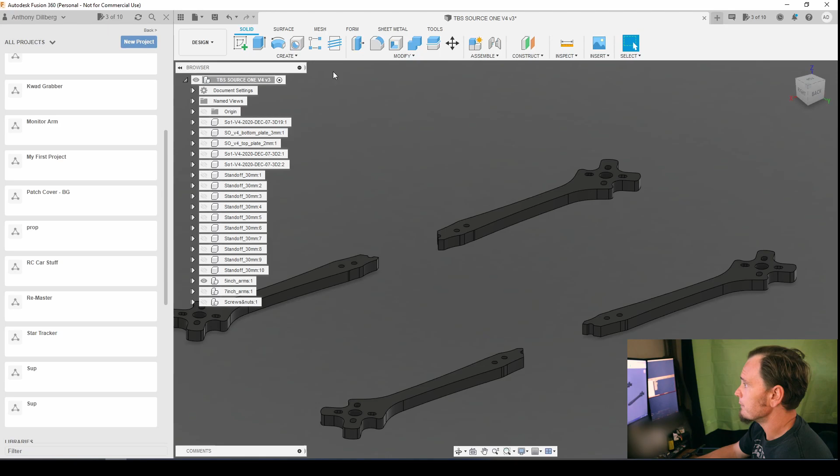So what we're going to want to do up here in the upper left corner, you're going to want to click on where it says design and just go to manufacture, give that a click. That's going to take us to our manufacturer workspace.

So this is where we can do our cam profiles for either a CNC machine. You can also set up profiles for 3D printers, which is pretty interesting. It'll let you do things like simulating the tool path and stuff, so before you take it out to the machine, you can see if it looks good.

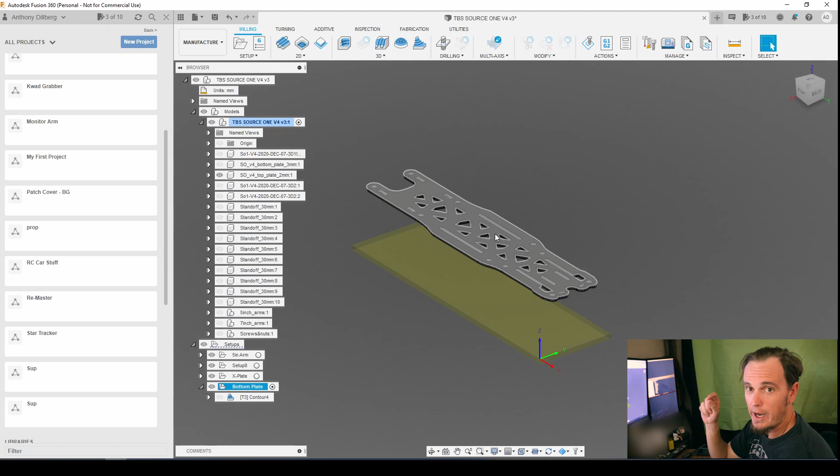If it's doing anything funny that you don't think is going to work out, or you don't want it to, you can simulate that before you actually stick the SD card in the machine and start your cuts or your prints. So once you're in the manufacturing workspace, we're going to want to go up to the upper right hand corner.

You'll see a little icon that looks like some tools. You want to click on that. That's the tool library, and that's going to bring up this screen here.

You can see, since we're working on a project, these are all the tools that I've used so far in this project. Down here are the rest of the tools and stuff that are in the library by default.

This is all of the tools, including yours, that you've added into Fusion, scrolling forever here.

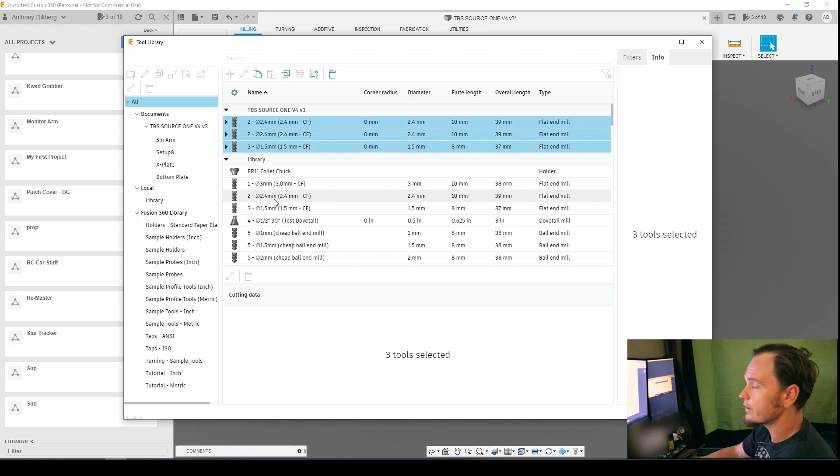So what we're going to want to do actually here, because we don't care about the Fusion library at the moment, we're going to go to library. Now, if you don't have one, it should have the local one, but by default, it'll just be empty.

If you want to add one for a specific project or anything like that, you can just right-click and say New Library and go from there. You can also duplicate the library if you want to use some of those tools.

So what we're going to want to do, once we have library selected here, you can see all of the tools that I have created so far.

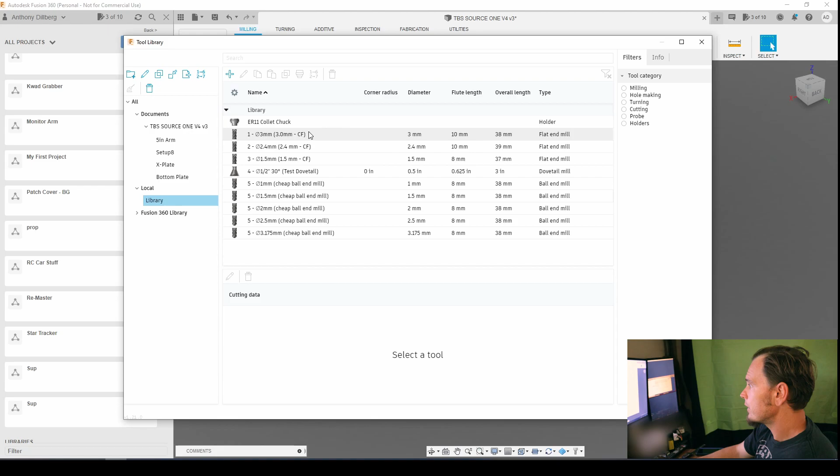We are going to start with this 1/4 inch bit because it's really simple. So you're going to want a measuring device. Calipers are going to be great. If you don't have that, a good metal rule will suffice, but calipers can be pretty handy.

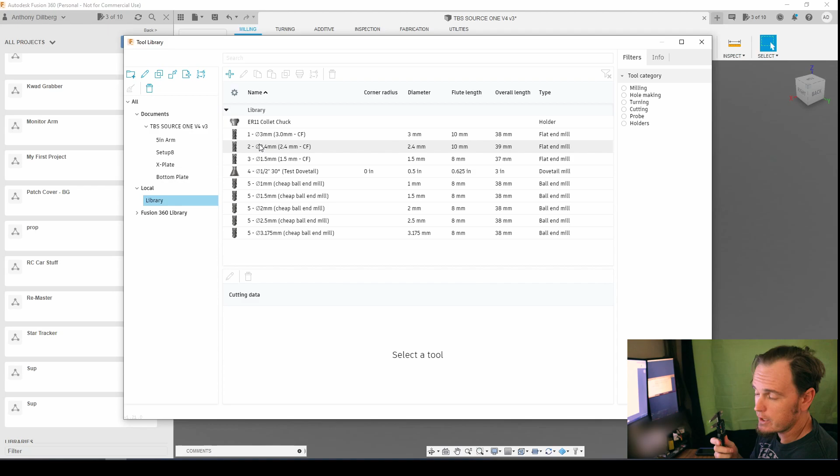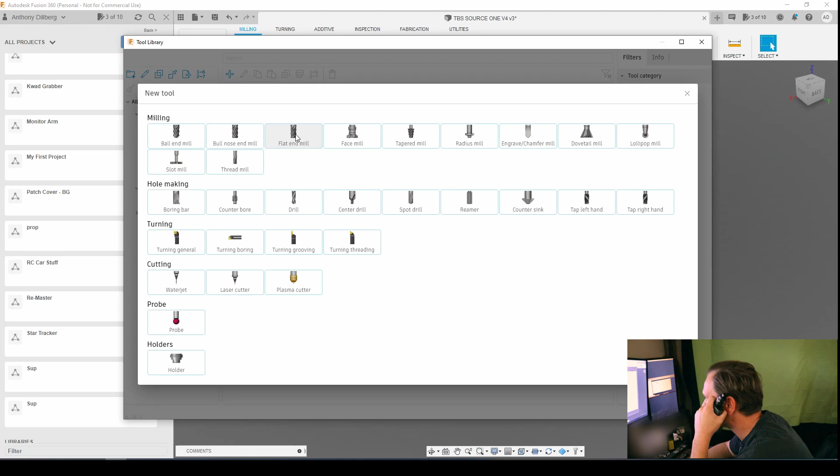So we're going to come up, click New, and we're going to be presented with a bunch of default templates. We're not going to be doing a holder, so you don't have to go down that far. It's not a probe or anything. I guess we're going to go with a flat end mill because that seems to be the closest to what we're doing here.

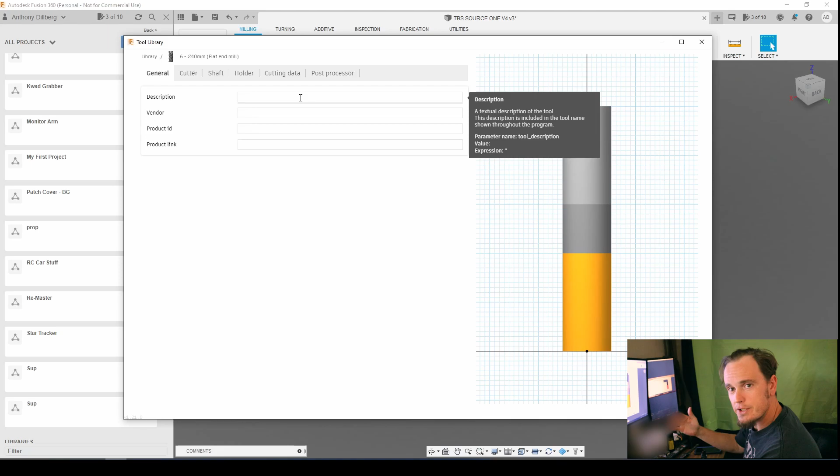Once you click on that, it's going to bring up the window for the actual tool. If you have this actual information, it's a good idea to go ahead and put it in here, just so you know exactly what tool it is, in case you have two similar tools, or you need to get another one and don't remember where you got it.

So you can put in a description. This is a 1/4 inch router bit. I think this is high-speed steel, so we'll say HSS router bit. We don't know the vendor or product or any of that stuff. If you know the product ID, like the part number, it's a good idea to put that in there, because if you have to get a new one, you can just search the part number. If you have a link to where you got it, you can chuck that in there for the same reason.

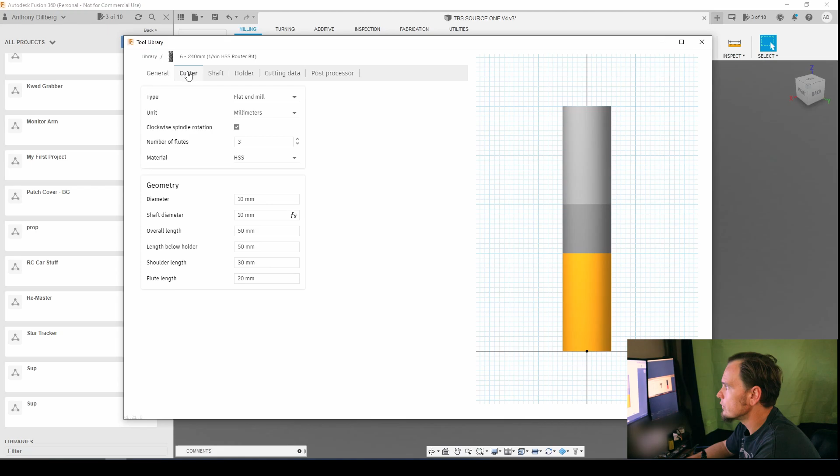Next, we're going to go to the actual cutter itself. If you decide you wanted to change it to a different one of those other options it gave you, you can click the drop down and change it here. We're going to leave that.

So it's a 1/4 inch bit, but we're going to go ahead and leave it in millimeters, because everything else in the project and everything I'm doing is millimeters. Even though I am an American and I love freedom units, millimeters, frankly, are a little bit easier to design with, so that's what we go with.

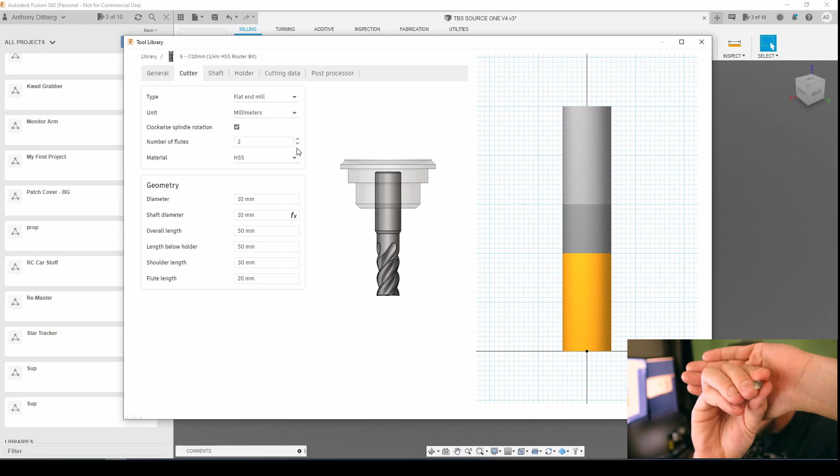Number of flutes - this is the number of slots or grooves, effectively the number of cutting surfaces on your tool. So this one, it's 2. There's 2 cutting surfaces, 2 slots going up there - that's 2 flutes, so we're going to change that to 2. It should be a clockwise rotation. Yep, it's clockwise. That's pretty standard, so we'll leave that checked.

The material is what the tool is actually made of. In this case, I'm pretty positive it's just high-speed steel by the look of it, and it was cheap. It's not coated with anything, it's not carbide, and we're way too broke for ceramic tools. So we're going to leave that at high-speed steel.

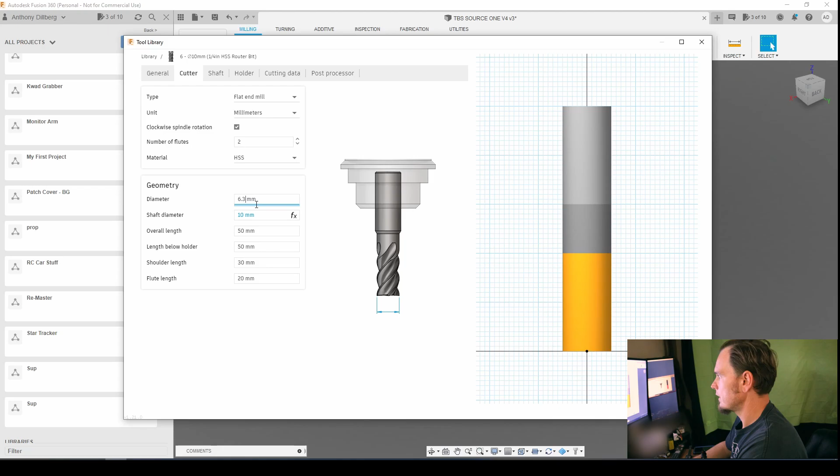The shaft diameter should be the same, but it's good to check. Oops, gotta get on the actual measuring surface. Yep, 6.3.

The overall length is the total length of the tool. That one's a pretty easy one to measure. That is going to be 51.3.

51.3. Length below the holder is the part that is going to actually be sticking out below whatever you're holding it with. In this case, an ER11 collet chuck. This particular bit, I'm going to take it right up to the end of the flutes, basically. So that is going to be, we'll call that 23 and a half.

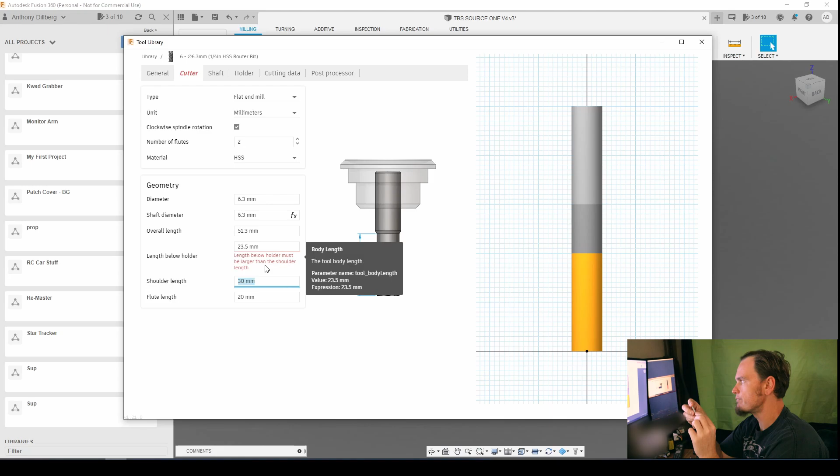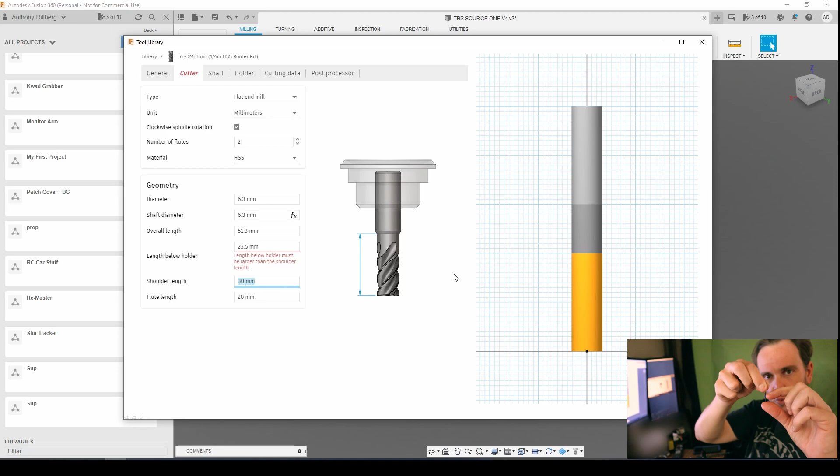23.5. The shoulder length is basically the length up to the end, well, where the shoulder is. Basically, it's kind of the end of the grinding on the tool. In this case, it would be like right before it flares, up to where it flares. So from the flare down, basically all the way to the tip. So from that, the top of that shoulder, all the way down to the tip of the bit.

So we're going to go here, and that's going to be actually just a tiny bit shorter than the end of the flutes on this one. So we're going to go with 20.75.

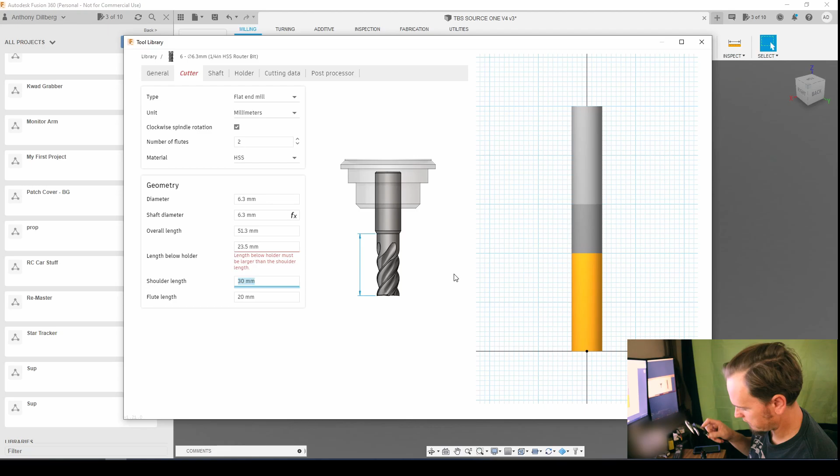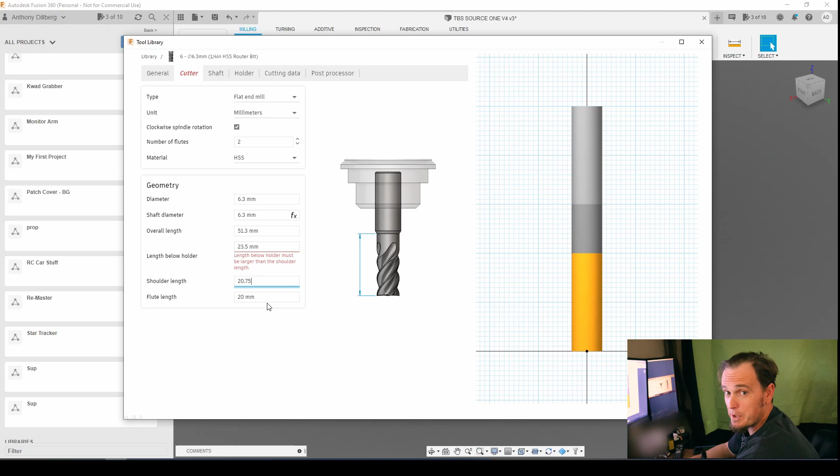And honestly, for most cases, these lengths aren't super critical. If you're using a more advanced machine, it probably is. But again, all of this is going to come in the data sheet with your tool. So if you're using a more advanced machine, you're probably using a better tool than I have here, and it should have a data sheet. So you should be able to look that up and just punch those numbers in here.

So the flute length here is going to be the same in my case as the length below the holder, but it might actually gripe at me here. Yeah, okay, so the shoulder length must be larger than the flute length. So we're going to swap these basically. Yeah, so we're going to make the shoulder length the same as the length below the holder, and it should be fine. Then we'll make the flute length the 20 and 3/4.

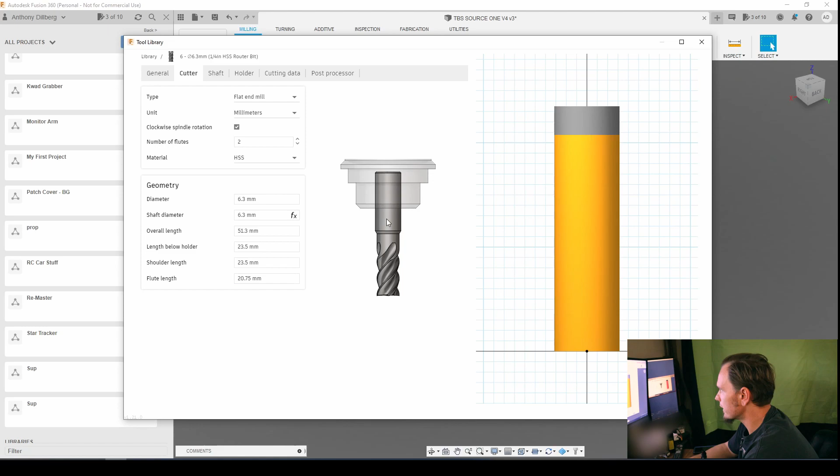20.75. So there's our tool, and you can see on the right-hand side here, it gives us somewhat of a preview. It's kind of a generic thing because it's acting as if it's cutting a cylinder, which sort of is, so you don't have to see all the flutes and so on and so forth.

The next thing is the shaft. I don't really do anything here. I guess it could be that if it's like a brazed on ceramic cutting tool on a high-speed steel shaft or something like that, then I suppose you would need to do that.

The holder, in this case, I have an ER11 collet chuck already designed, so I'm going to select that one. And you can see the preview here is going to change, and it's going to look kind of similar to that guy there.

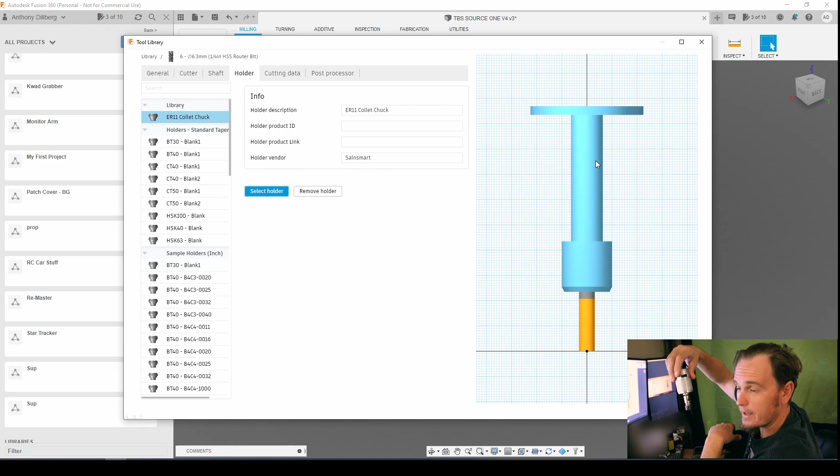The cutting data - this is going to be the speed, like your speeds and feeds and all that stuff for the tool. So in this case, the spindle on my machine is the 20,000 RPM spindle, but because I haven't upgraded to a newer or better power supply, it doesn't quite get it all the way up to 20,000. So we're going to spin this at 14,000 RPM.

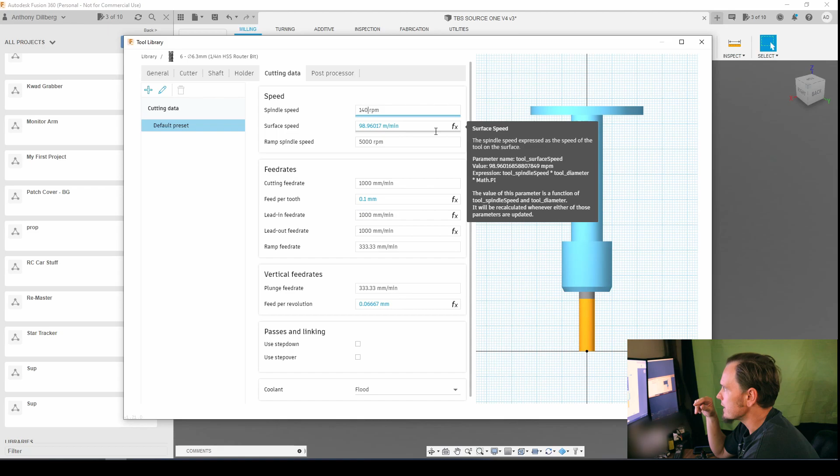And ramping - no, we're going to keep it because we want to keep it at a steady 14,000 RPM. So we're going to keep the ramping speed the same as well.

Cutting feed rate is where we're actually going to want to cut that way down. So we actually want to go to about 120 millimeters a minute. Should be pretty good.

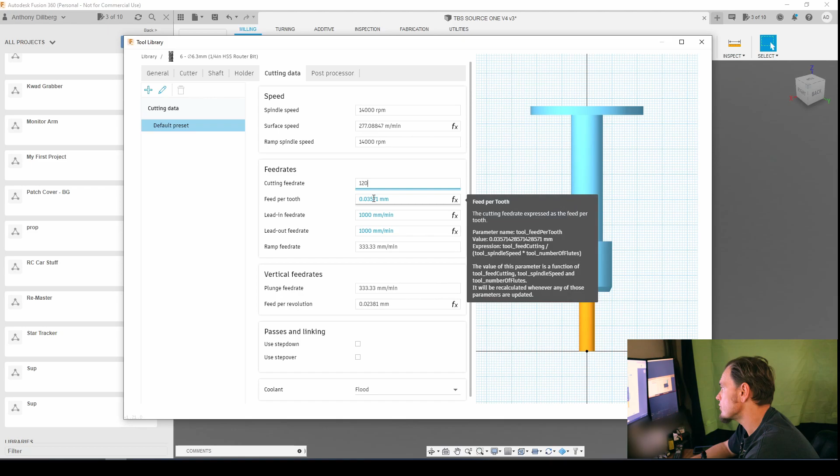And you'll see all the other stuff will kind of update automatically, except for the ramp feed rate. And I usually just keep the ramp feed rate the same. It seems to be okay. If anything, you want it to be a little bit slower, it seems like to me, because it's actually diving as it's moving.

The plunge feed rate, again, if it's going in, for this particular type of bit, we're going to want to keep that really slow. Not quite like 1 millimeter a minute kind of thing, but probably like 10 millimeters a minute. That should be slow enough.

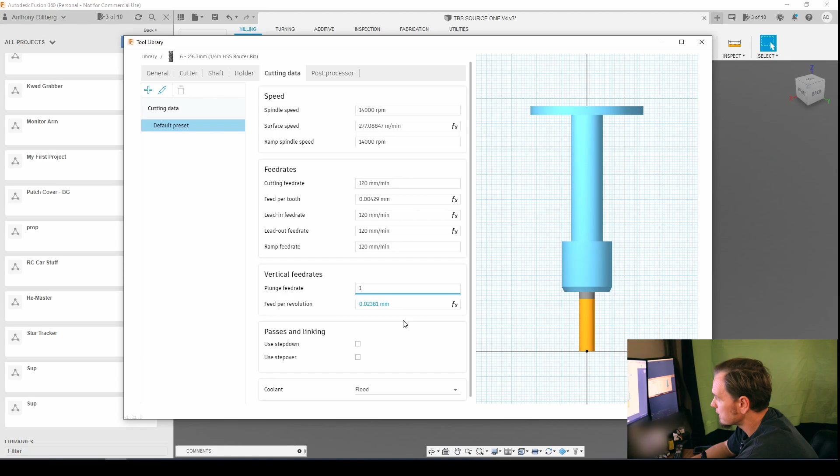We're not going to be using any coolant because this machine doesn't use coolant, so we're going to disable that. And yeah, we shouldn't really have to worry about the step down, step over stuff.

The post processor. Oh, okay, yeah, so this is like if your machine has automatic tool changing and stuff. We don't have to worry about that.

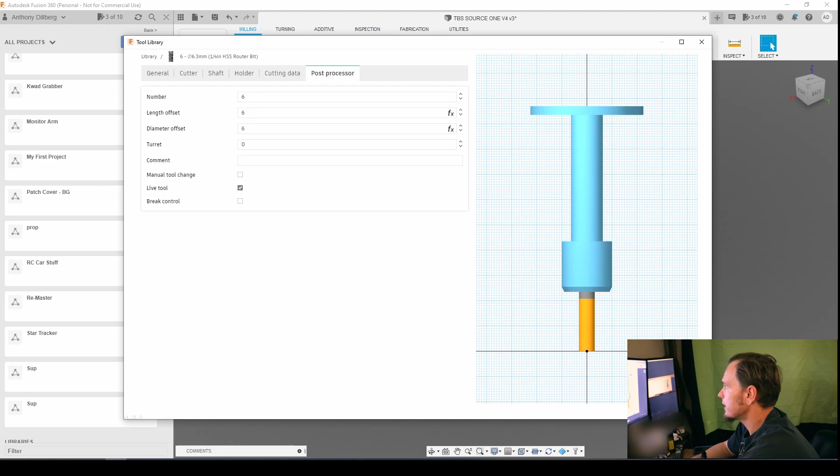So now we just hit accept, and now you can see we have our 1/4 inch high-speed steel router bit. So that is making a tool. I probably made that way longer than is really necessary, and maybe even more vague than it should be. But hopefully it's as simple as it needs to be, and clear enough that you can get your tools in here.

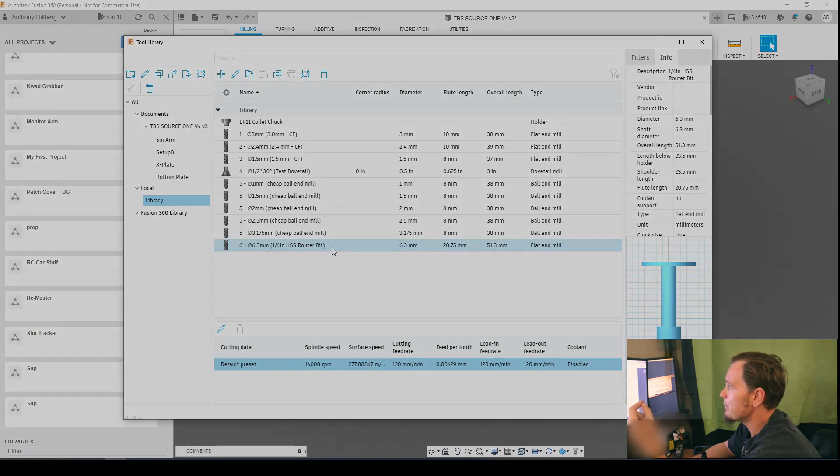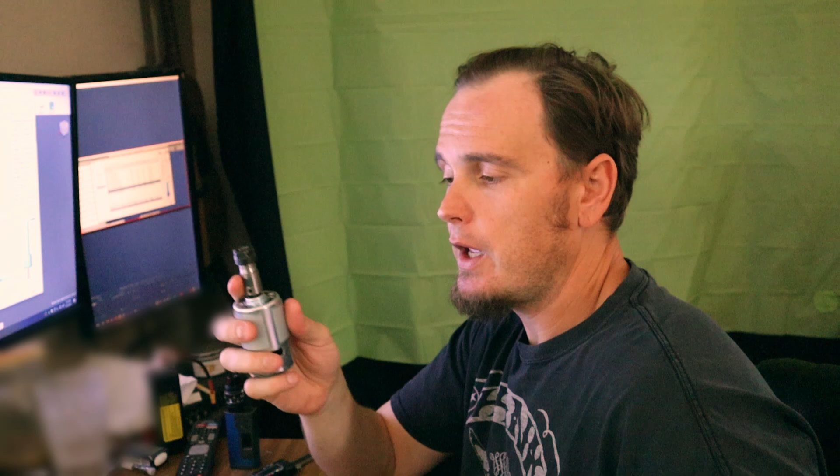And this is not in the Fusion library by default, which is not entirely surprising because it's mostly like a router chuck and small tool thing, and Fusion honestly is geared for bigger operations. You can use the personal license like I am now, because my student license finally expired, which is sad because the student license actually has all the stuff, so all the rapids are gone. That's the biggest thing, so the machining process takes longer. For me anyway, that's the biggest thing. Anyway, so we're going to be making that tool holder.

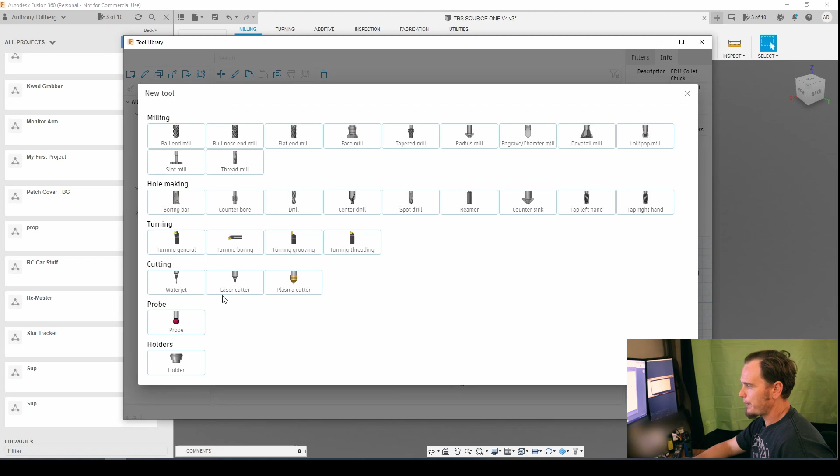As I showed you before, I do have one made already, but I want to make another one just so we can demonstrate. So what we're going to do is go back up here to the tool library, go to the upper left, click the plus symbol for new, and this time we're going to select holder.

This is a little bit of an interesting thing, and it confused me until I finally found a video that sort of explained it decently. I wish I could remember what video it was so I could leave a link in the description. If I can find it, I will.

So anyway, same thing here. When this window comes up, you're going to have description, vendor ID, all that stuff. If you have that available, put it in there. It's good to have.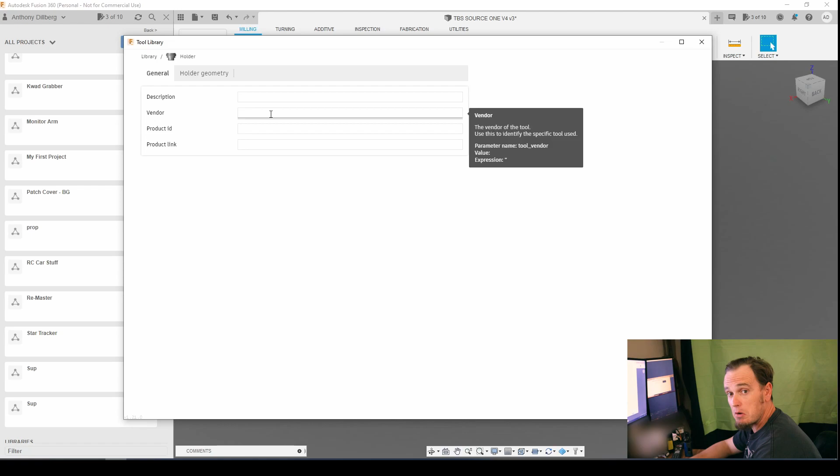Next is going to be the holder geometry, and this part isn't necessarily straightforward if you've never had it explained. Once it's explained, it's like, oh yeah, that makes sense. Basically what you're doing is creating a series of cylinders and cones that are stacked up to create the outline of your tool holder.

So in this case, again, the ER11. What we're going to want to do is break this down into separate measurements in stages. We're going to start from the top of the holder and work down. If we're looking at it this way, it's bottom up, but considering it's normally oriented that way, it'll be top down.

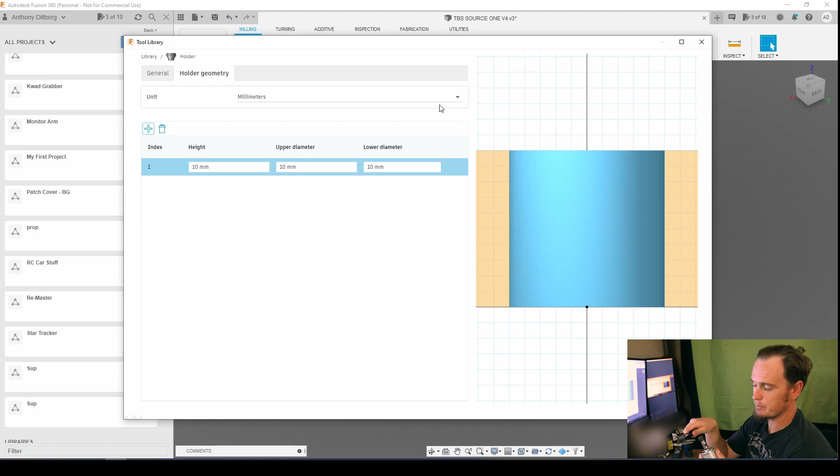So first, we hit the plus. That's going to give us generic 10, 10, 10. We definitely don't want to stay with that, so we're going to take some measurements here. We're going to show the base of the motor itself, because on the machine it does stick out just a tiny bit. Let's start here since we're on the height.

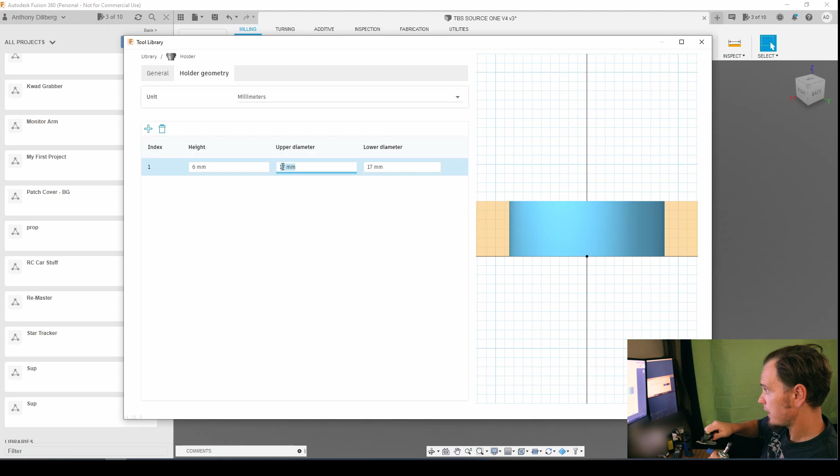Measure that, so we're going to call that 6 millimeters. This will make a little more sense as we go on here. So 6 millimeters high, and the diameter of the motor is 42 millimeters. Because we don't want any taper there, it's going to stay 42. Okay, so now we've got that little base of the motor there.

Okay, so next we're going to show the little nub on the base of the motor there. We're going to hit the plus symbol, and it's going to show us our copy - it's going to copy the previous one, which is fine. We just have to modify it now.

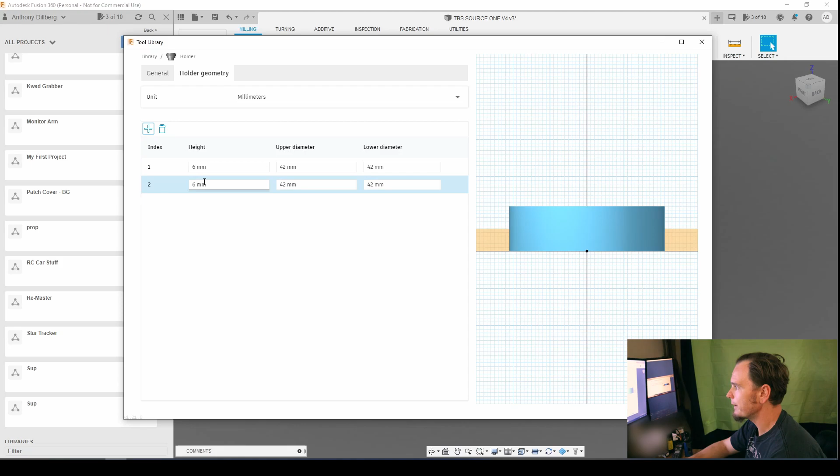So this is going to be 4, 17, and 17 from our previous measurements. Now you can see it's starting to look like a little top or button or something from the side. Okay, so that's the base of the motor to where the shaft of the chuck begins.

So we're going to see if we can get on that shaft, get a measurement there. If not, we'll eyeball it. Looks like it's probably a 6mm shaft. Yeah, 6mm shaft. And then we're going to want the distance in between there and what we'll call the chuck.

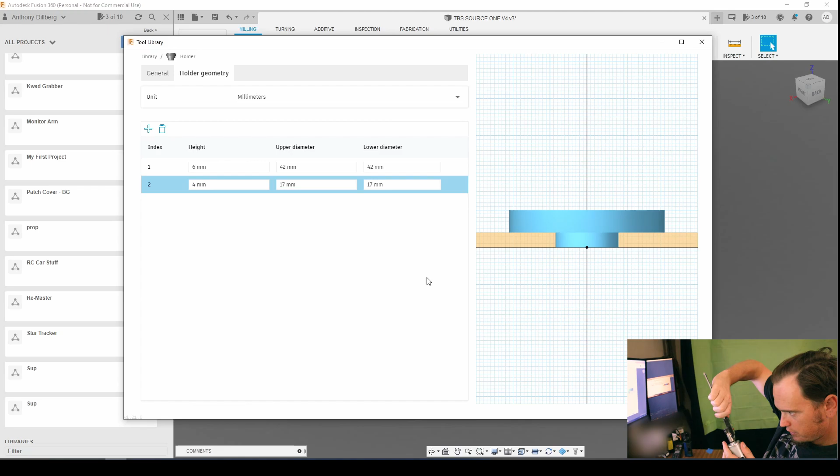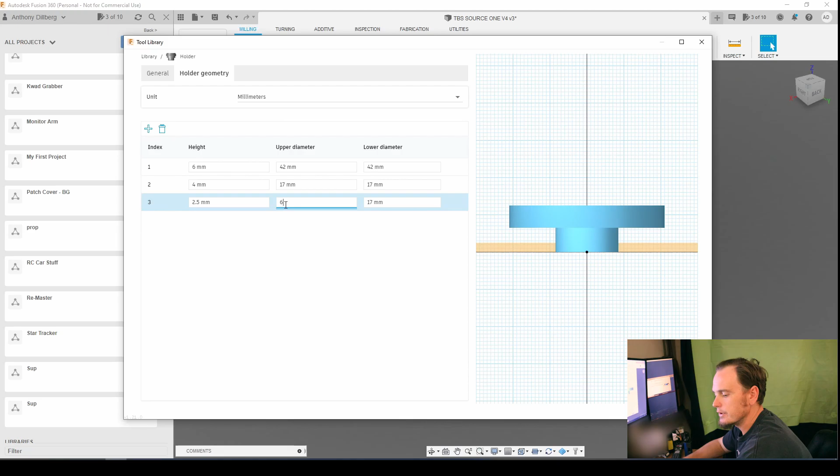2.7, call it 2.5. So we're going to copy that, and it was 2.5 millimeters tall and 6 millimeters in diameter at the top and at the bottom. Starting to come together now. So we've got that little tiny piece of just a shaft, which it would be nice if it wouldn't require a big chunky motor to make this shaft go all the way through, but it's what you get when you're working with a small machine.

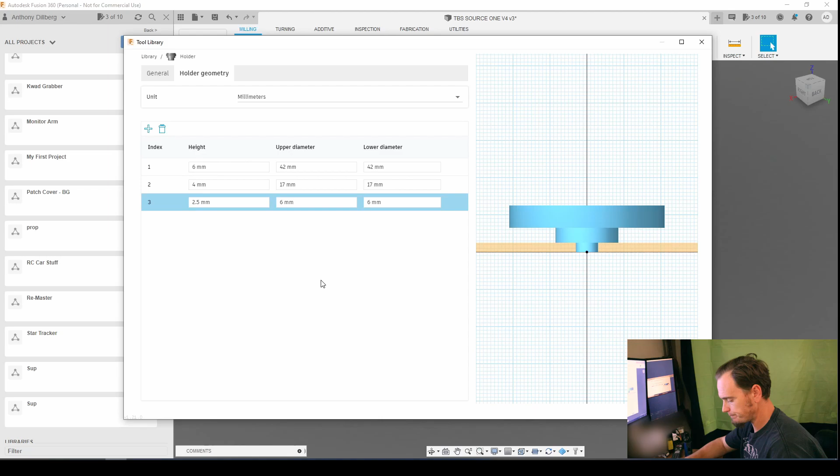Okay, so next we're going to start on the next one here, and we're going to the actual chuck part now. So that is going to be 16 mil. Seems about right, let's see. Yeah, 16 mil diameter. Oh wait, hang on, that starts with height. That's okay, we'll go to 16 mil and 16 mil here, and then we'll go back to the height. Okay, so the height is this way then.

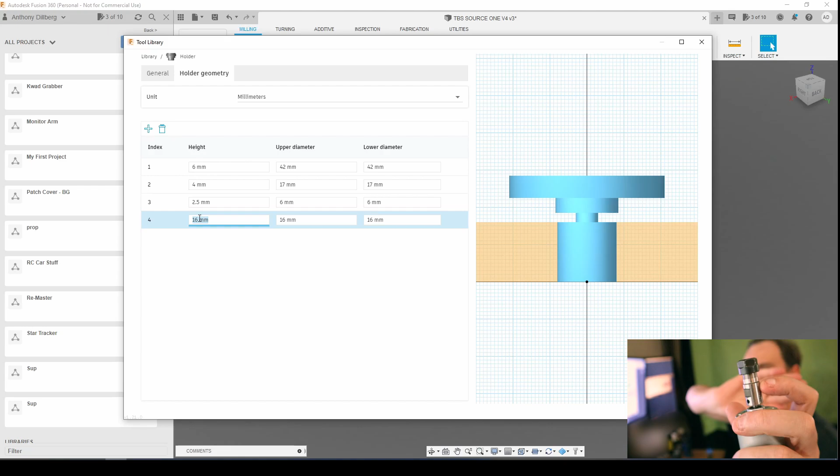20 millimeters. There's a little shoulder there, I don't know if you can see that. That little shoulder is going to be our next cylinder, where that starts. So it's going to be 20 millimeters tall.

So we're going to go add. And right there, if you wanted to be really accurate, you could put all the little tapers in and stuff, but they're so small on this thing, it's unnecessary.

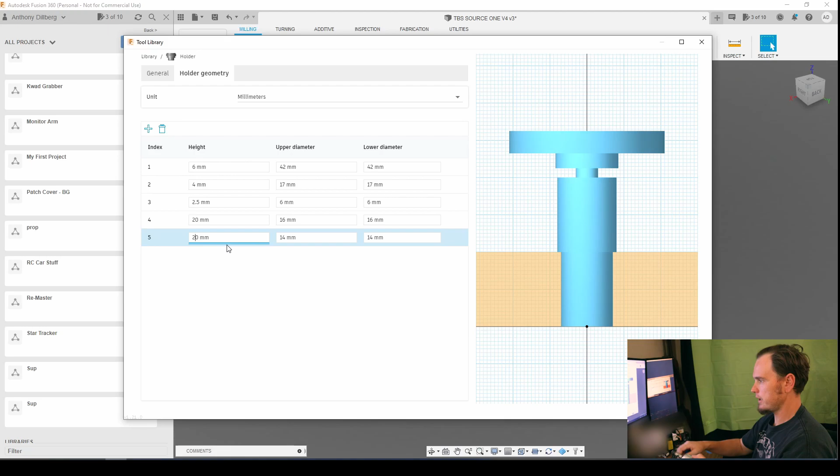So the next one is going to be 14 and a quarter in diameter. We'll just call it 14, a quarter of a millimeter, it's not going to be a big difference here. And then the height is going to be to the base of the nut there.

That is 8.8, we'll call it 9 millimeters.

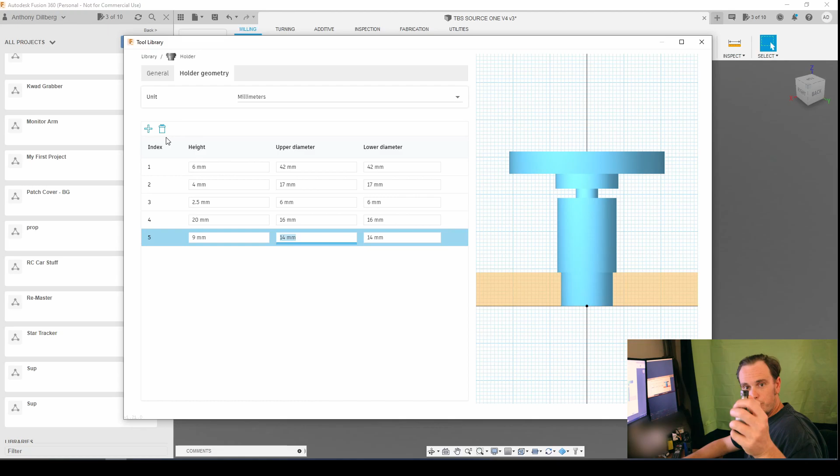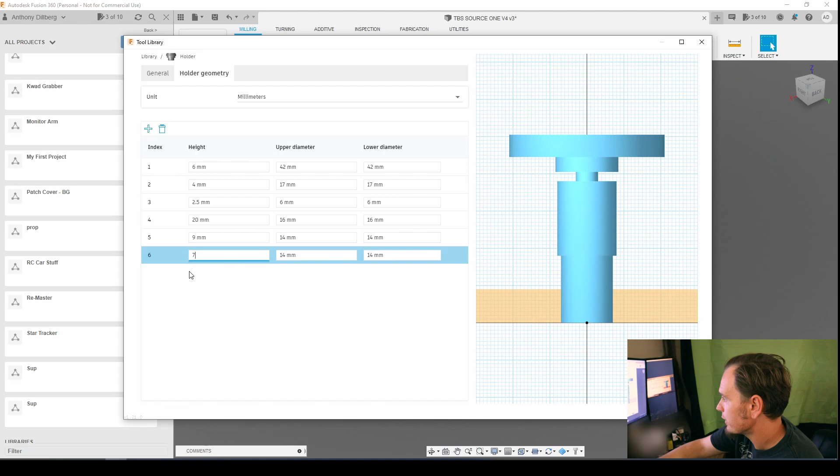Alright, so now we're going to do the profile of the nut itself. We'll get a tiny bit detailed here so we can show the chamfers for the hex cuts and the tiny bit of bevel at the bottom, just because that's closest to the tool, it'll be a little teeny bit more accurate there. We're going to call that 7 millimeters tall, and that's going to be 19 millimeters in diameter.

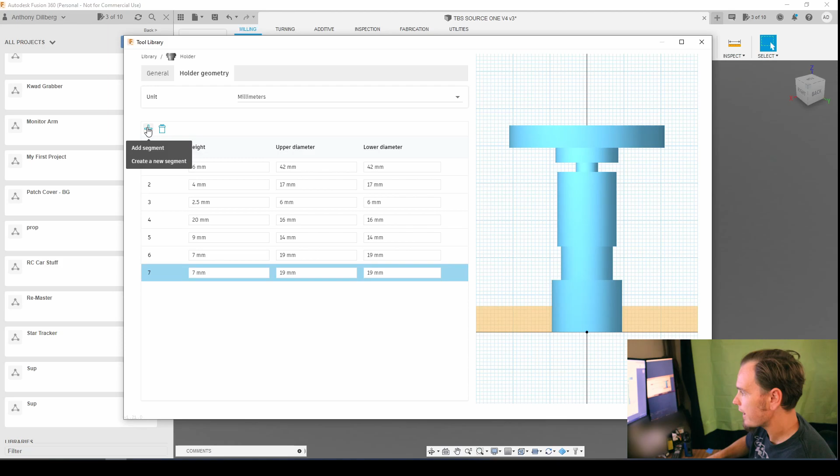Alright, next part where the actual hex cutouts are, that is going to be 5 millimeters. I believe this is a 14 millimeter, or no, 17 millimeter. Yeah, 17 millimeter hex.

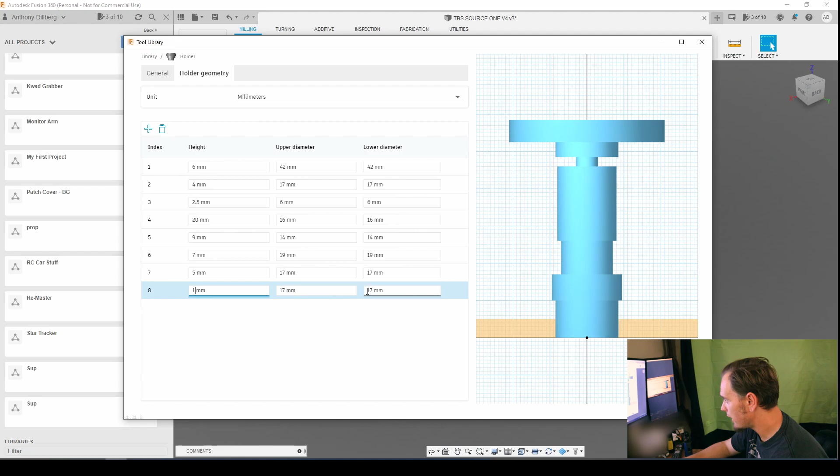Okay, and then the final little tiny part, which is the taper, that's going to be just 1 mil tall. It's going to be 17 mil at the top, and we're going to taper down to 14 millimeters.

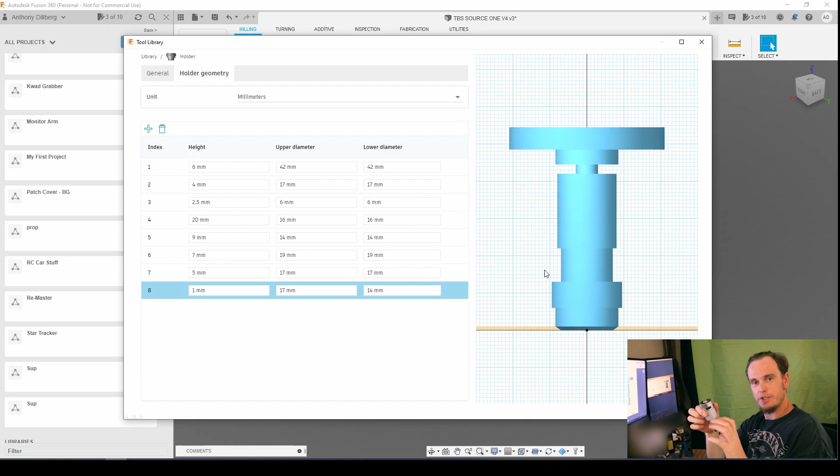There you go, so now you can see the tiniest little taper at the bottom, which kind of reflects our actual collet. So again, what we're doing here is basically just creating a series of cylinders, which is what we have here, and we're stacking them up to make the profile of this. So as if you're looking at it just from the side on, that's what this will be. And then Fusion is going to make a 3D cylinder stack to represent this in your manufacturing workspace.

There you go. When you're doing your CAM profiles and stuff, which we're going to get to in just a moment. So now that we have all of that set up, since I think I am actually going to keep this one, we're going to go back here. We're going to call this a SainSmart ER11.

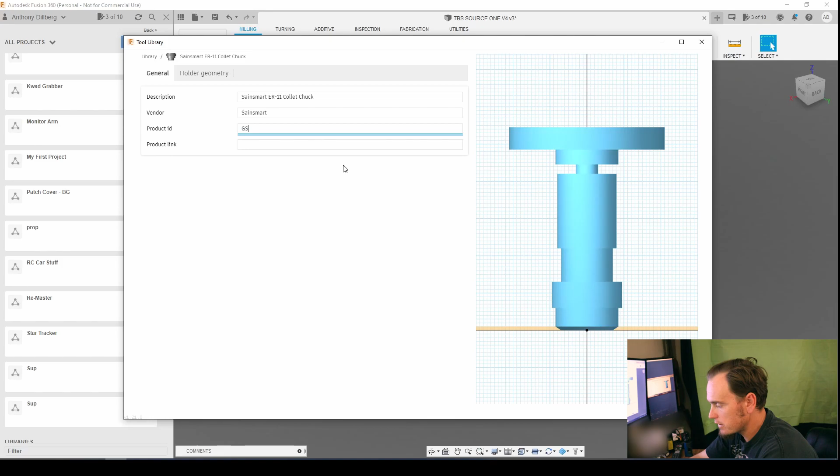Call it Chuck. The vendor is going to be SainSmart. Product ID GS-775M.

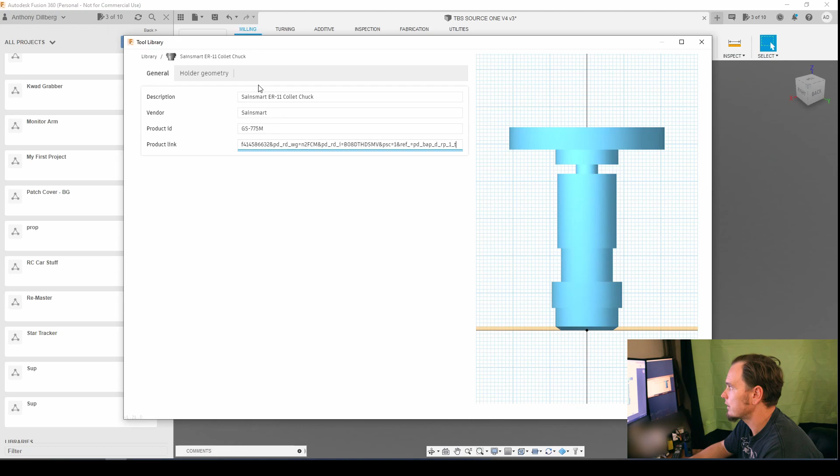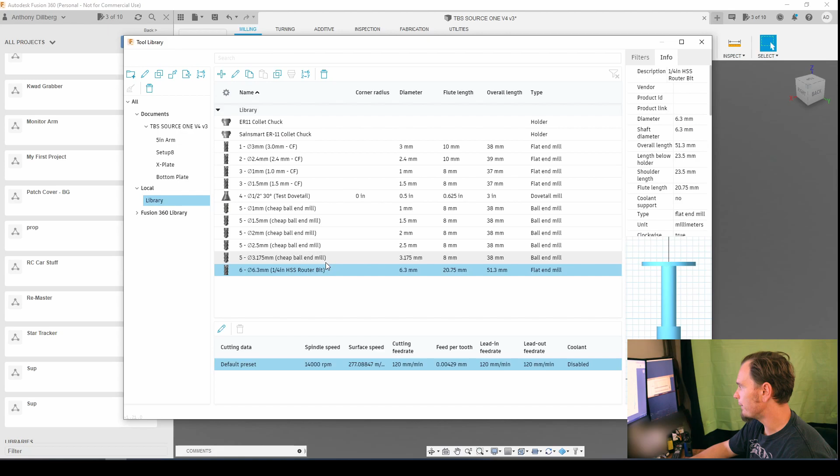So now what we can do is when we are setting up our CAM profile, it's going to ask us to select a tool, and we can say which tool and which holder, or we can even just say which holder each tool is going to use. So let's go in here, we'll edit this, and then we can come over here and select that holder. There we go, and now it's going to use that one in the CAM profile when I select that tool, because it's automatically associated.

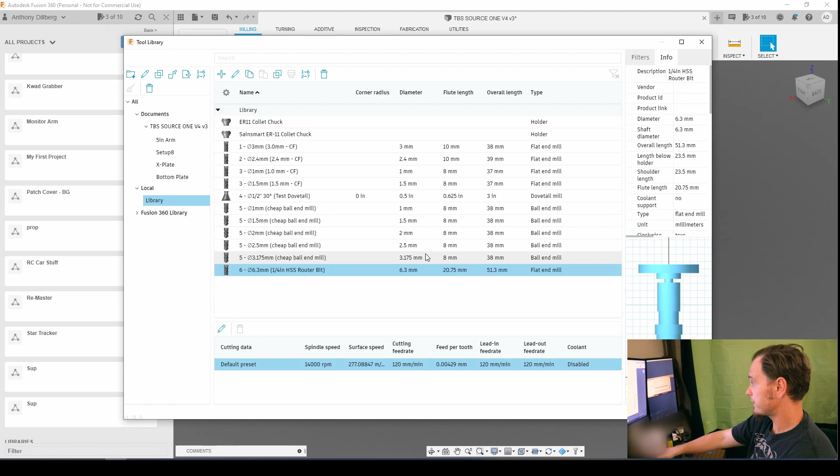So I'll probably have to go through and change all of those for all of those tools, because I think that's the one I'm going to want to use. If you look at it, to me, that looks pretty close to that bad boy. That looks pretty good, so I'm going to use that one from now on, I think.

Thanks, guys, you helped me out. Appreciate that. But that is creating a tool holder.

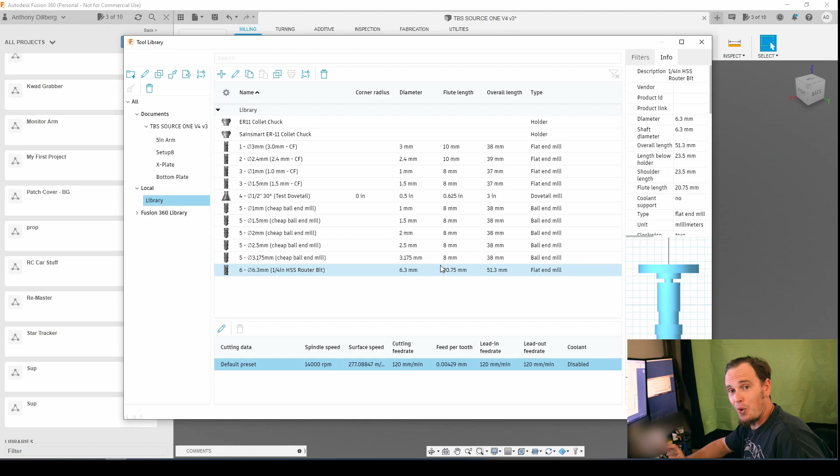So next thing we're going to do, now that we have that all done up, we want to make a CAM profile for this top plate here. So the easiest way I have personally found is to basically start with all of the other bodies or components just hidden, turn them off, and we're going to work with this one part.

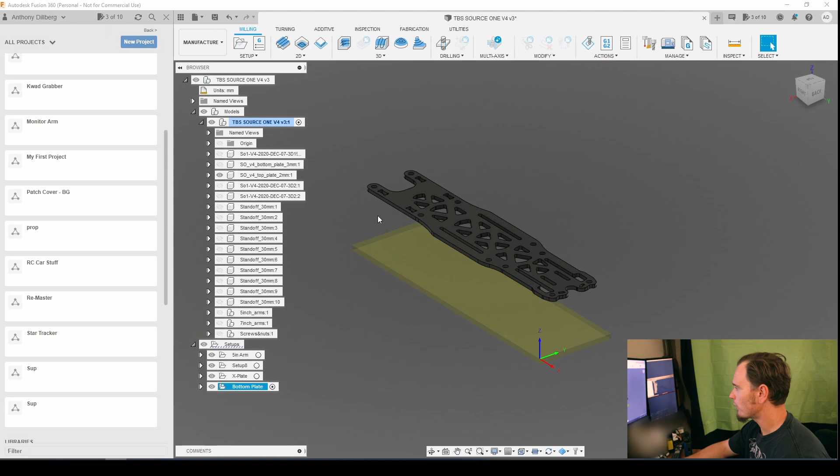So right now we have the top plate selected here, you can see it is highlighted. What we're going to do is come down here to setups. We'll go ahead and shrink that. We're going to go to setups, right click, say new setup.

And what it's going to do is by default it'll try and use the same setup basically as your previous one, and I think that's in case you have to do multiple operations on the same piece, which is actually kind of a neat feature if that's what you're doing. Thankfully these parts are simple enough that I can do everything basically in one operation.

So what we're going to do is we want to make sure we have our machine selected. I do have SainSmart. We're not covering the machine setup right now, but you want to make sure that you have it selected. So you click on select your machine. That's the right one, already selected, so I'm not going to change anything there. We're doing milling, so that's fine. Let's see.

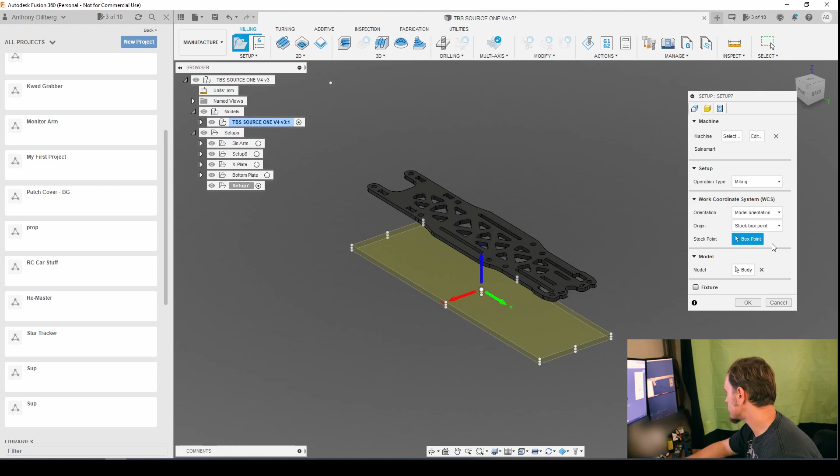Orientation, model orientation, stock box point, all that - that's fine. We're actually going to change something there, so we're going to come back to that in a moment.

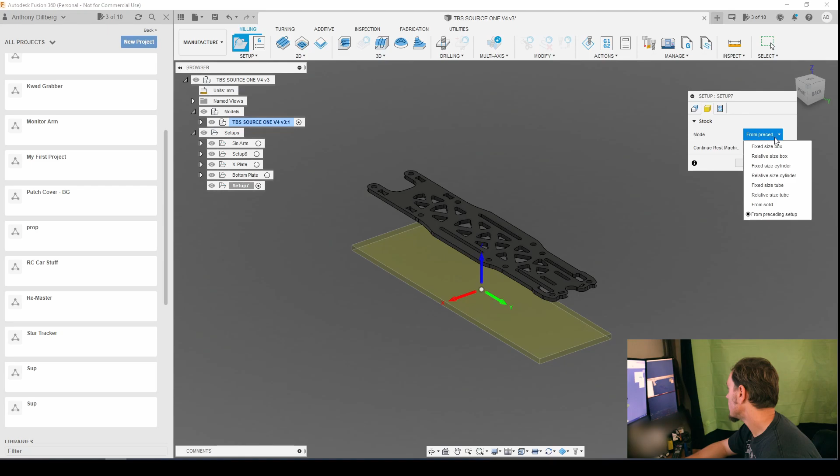So here we go, we're going to go to stock, we're going to change that to... which one is it? It's relative size box, yeah there we go. We don't need to mill off any excess material, which I probably could do in some things, so we're going to change this to 0 and 0.

Yeah, that's fine. Then we're going to come back here. We're going to select our box point for where we want our machine basically to start, or how it's going to be oriented, so it's going to be there. I think that's everything we need to do for the setup. So we hit OK, and now you can see that there's this box around here.

That's here. So what we're going to want to do is a 3D contour, and that's going to be the best for this particular cut or operation, just because it'll get everything done for us all at once. We don't have to do an operation for pockets, an operation for holes, and then an operation to cut out the border. This will do it for us all in one shot, which is really nice when doing a flat plate like this for a drone frame.

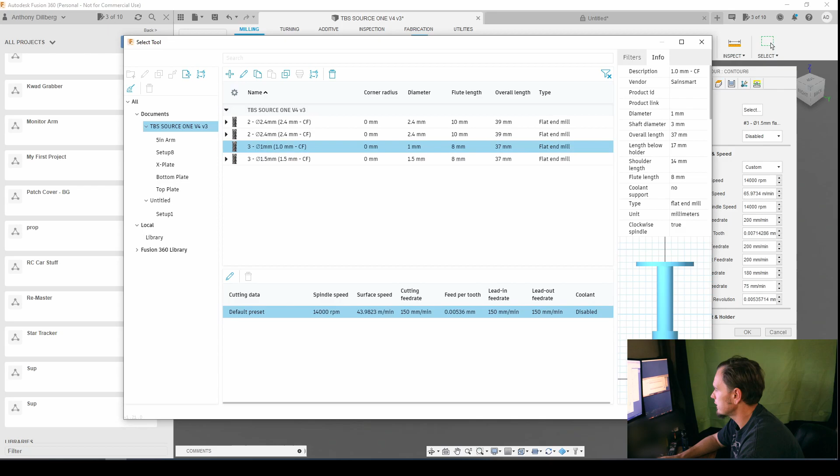So we go up to the top, we click on the 3D contour. We're going to select the tool that we want to use for this one, which is our 1 mil. That was one of the ones I did offline after I made that 1/4 inch one earlier. All the feeds and stuff should be good because they're part of the tool, or they're established under the tool, so that should be good there.

So next, we're going to go to geometry. We want to do a tool outside the boundary of our silhouette. That will keep our part from being undersized, so it'll cut to the outside of the line as opposed to just down the middle of the line.

If it cuts down the middle, then half of the tool width will - it'll reduce the part size or make a hole bigger by the width of half of the tool bit. So we don't want to do that.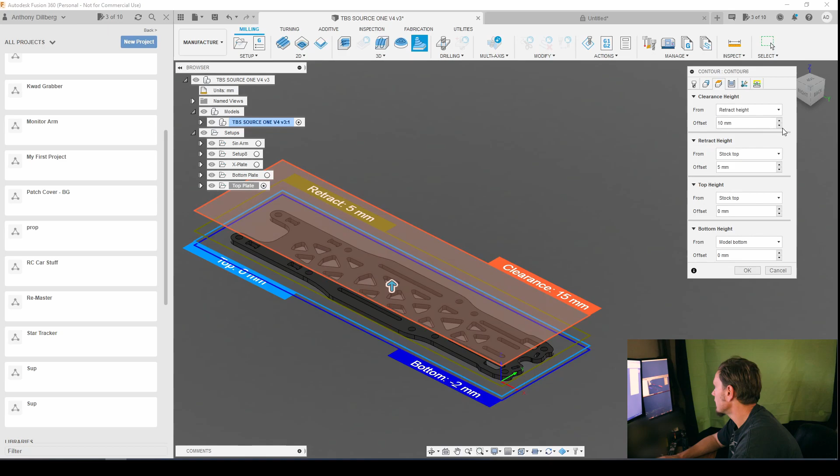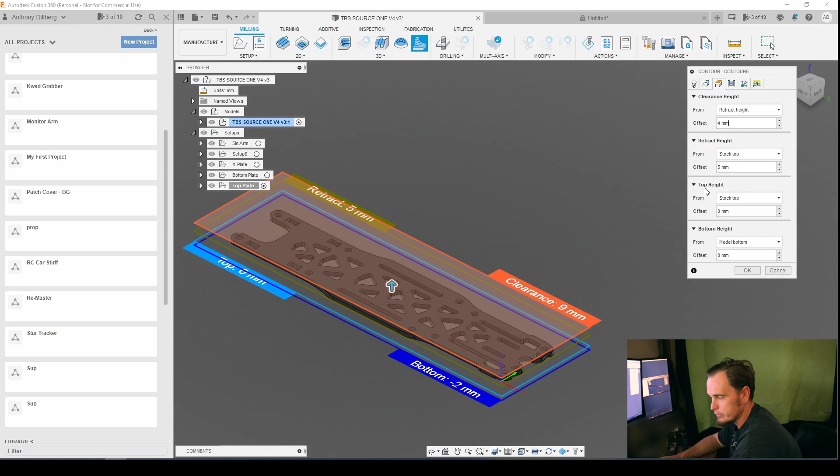So next we want to go to our heights tab here. I'm going to knock the clearance height down to 4 mil above the retract height. Retract height is fine at 5 mil. That means it'll come up 5 mil above the work surface when it has to move and things like that. The top height is the top of the stock that was established in our setup, which is the same as the part or the model, so that's good.

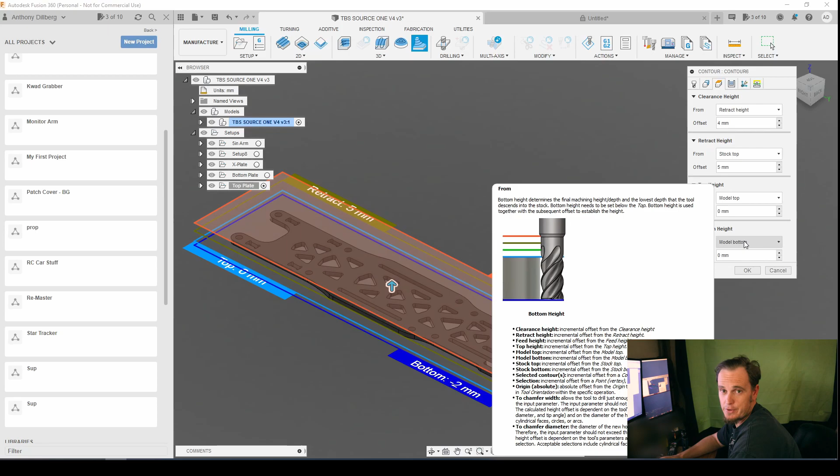We could alternately select model top and it would be the same because they're basically equal. The bottom height is model bottom, or you could do stock bottom again because they're the same height or elevation, I should say. But we'll leave those - model top, and model bottom is fine for now.

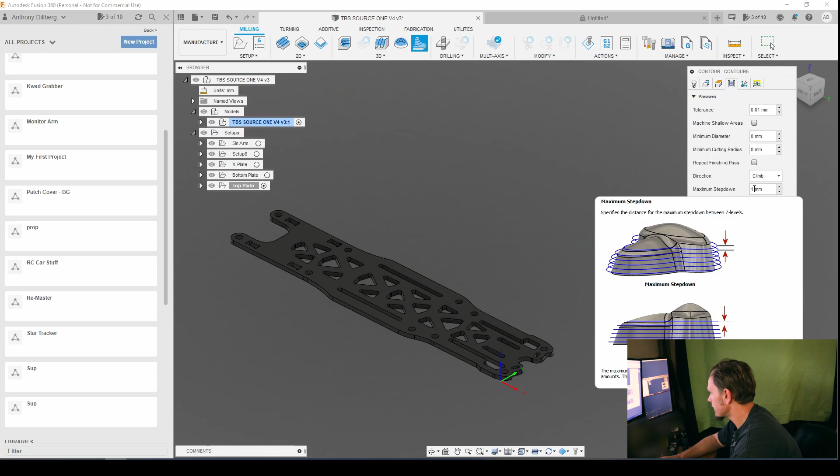Next, we're going to go to passes. The only thing we really need to change here is our step down, which is basically how far it's going to go down per pass. So we don't want to go quite a mil. I normally go at about a half mil, or I've been going at about a half mil.

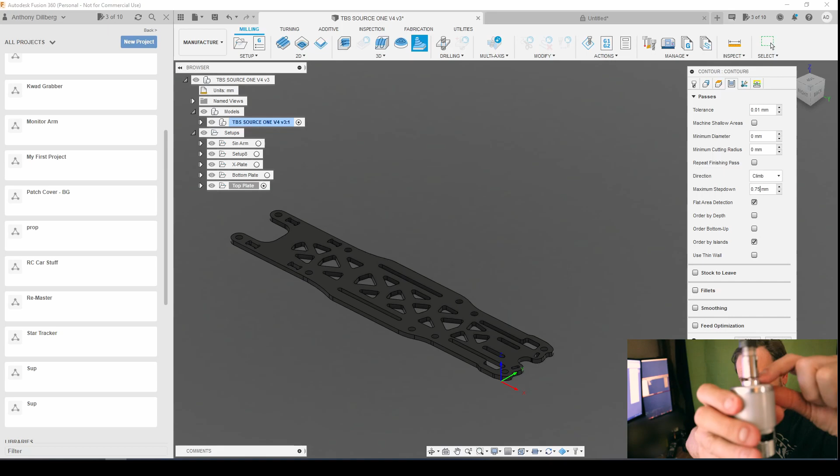I think the machine can go just a tiny bit more than that, and probably especially with this smaller bit, so I'm going to go 0.75. Only a quarter of a millimeter of a difference, but it can make a difference, especially on a machine with a shaft diameter that small, when you're putting force on there, plus all the plastic parts for mounting the spindle and all that stuff.

We're going to do order by depth, and what that'll do is make one pass on everything, then do the next pass on everything, and then the next pass, and it's going to only go down that 0.75 mil per pass. What that allows it to do is finish all the holes and everything before it cuts it out all the way, so the work or the piece can be held in place while it's finishing all the pockets and holes, so it doesn't move around and you don't have to reclamp or anything else like that.

So next we're going to go to our linking. Let's see, I usually just leave that at full retraction. That's fine. We can preserve the rapids, because rapids kind of don't work anymore with the personal version. Do I want to always use high feed?

We're going to preserve the rapids for now. I'm going to make a separate one with that and see, just test it. Why not?

I don't really have to worry about the stay downs and stuff in our case because everything is plenty far away.

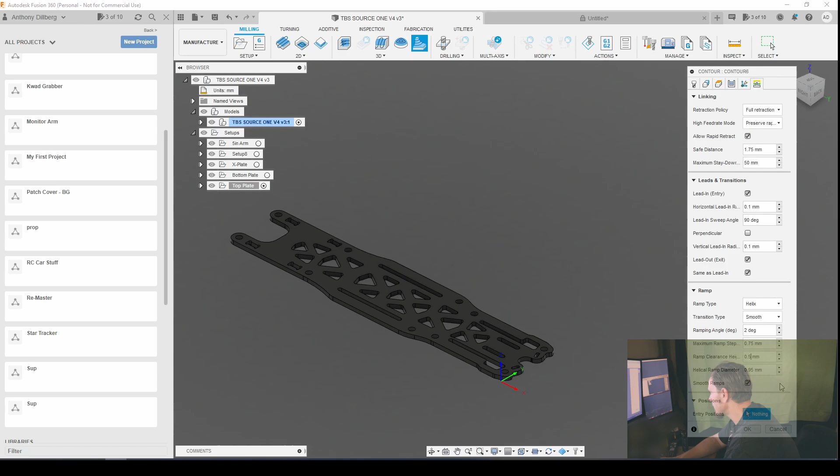Let's knock the ramp clearance height down, so basically where it starts to ramp down, we'll make that half a mil instead of almost 8/10 of a mil.

Then the ramp diameter can stay. We're going to leave the entry positions off because I think what it does on this machine is it drags across the surface to the workpiece, then it comes up and starts going. So we're going to leave that blank. I'm going to test that here and there too. So that will say okay.

Now you can see it generates the toolpath. All the yellow lines are where it's going to lift up and travel. The blue lines are cuts.

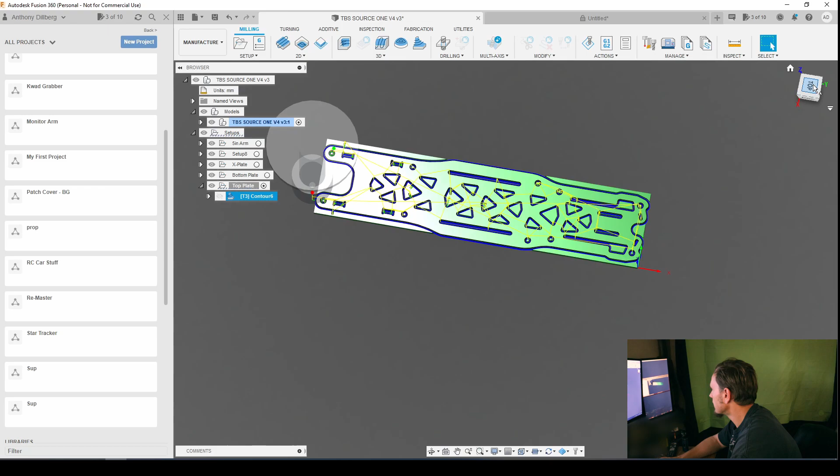Leaving the entry position off, it moves all the way over here, so we might actually want to go back and do that. But we're going to go ahead and simulate this real quick.

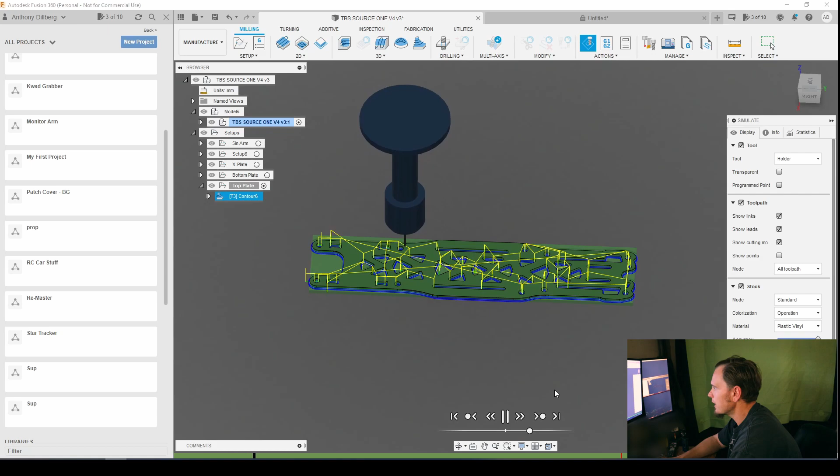You can see it's going to cut all the way around, and then we're going to pick up and it's going to do all the pockets. Sometimes it slows down because it's ramping in. And then it's going to make another pass.

Let's look at it. Looks like it can actually cut out these dog bones all the way as well, which is cool. Make it all the way around.

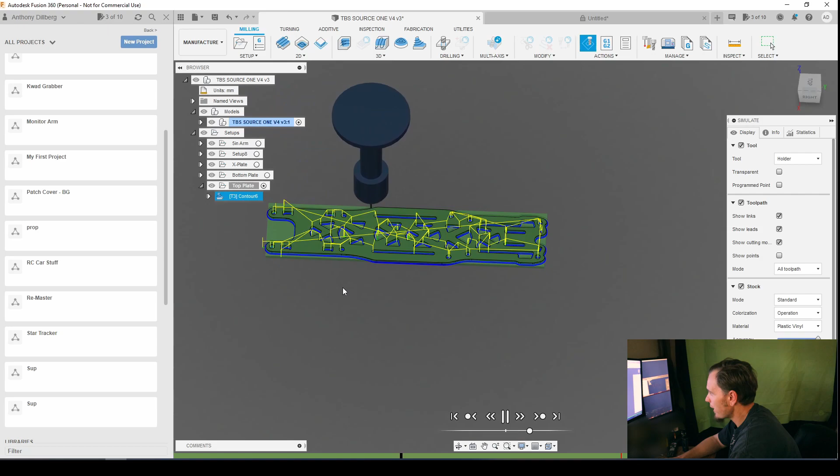We'll wait until it goes to the second pass here. So there we go. Now it's going to the second pass around, and you can see it's going to go do that all the way until it gets to the bottom.

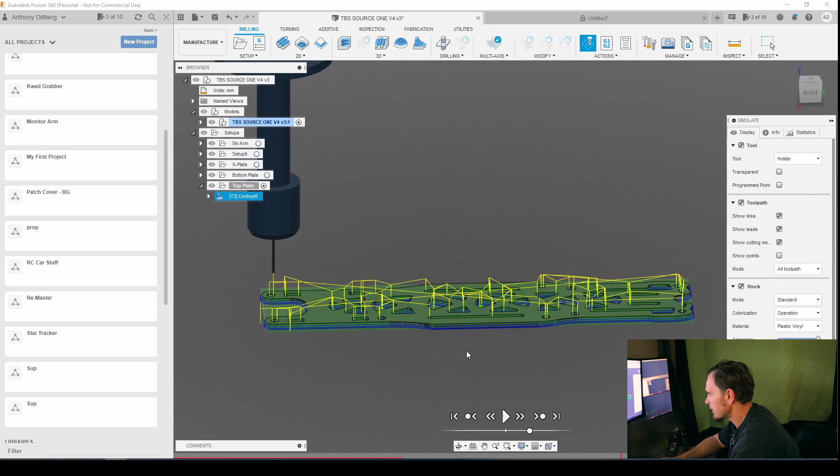Let's see. Yeah, that's skipped it. Okay, anyway, so it will end up cutting out the border last, which is ideal for this, like I said. So that way it's not moving the part around while it cuts out the pockets and the holes, and so you don't have to reclamp.

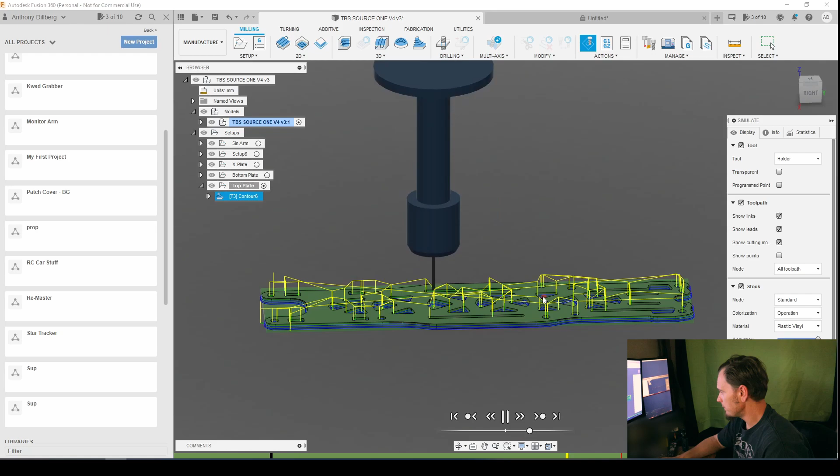So that's it, so now everything should be good. I think, like I said, I'm going to go back. We're going to edit this one last time. We're going to set an entry position.

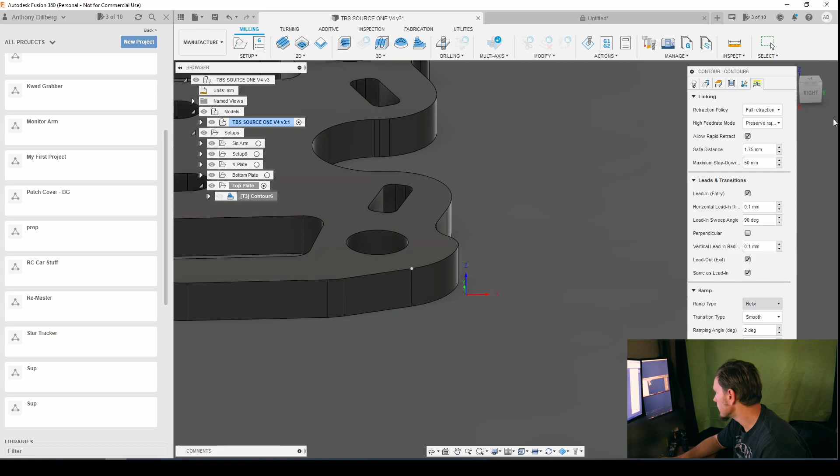Pick that spot right there. That should be okay, so that way, if it does still do its weird thing where it drags across the surface for whatever reason, it's not going to be drastic. It'll only be a couple of millimeters away, basically.

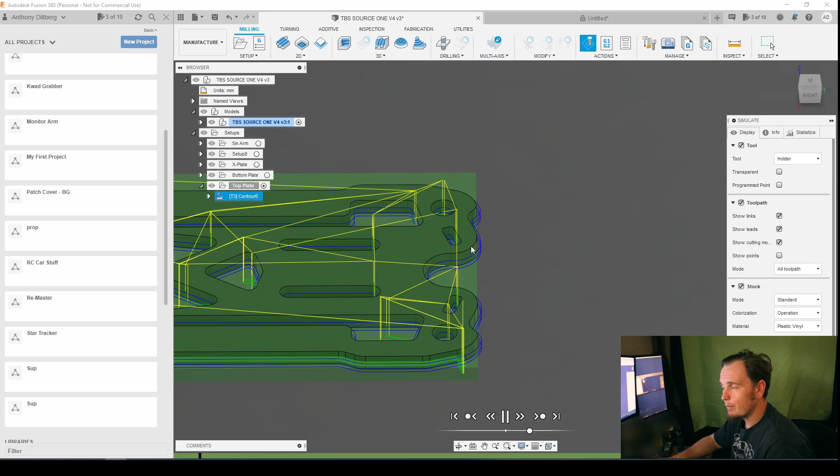So there you have it. That is how to basically do a basic 2D contour toolpath for a flat plate, and how to set up a tool and a tool holder.

Next I'm going to try and make another video, and we'll see if we can show the cutting process and all that stuff with the machine itself.